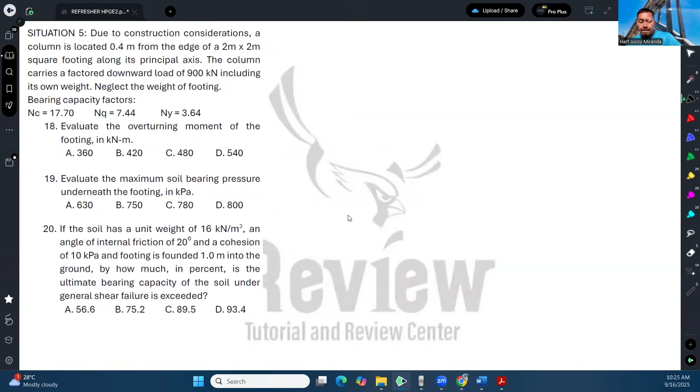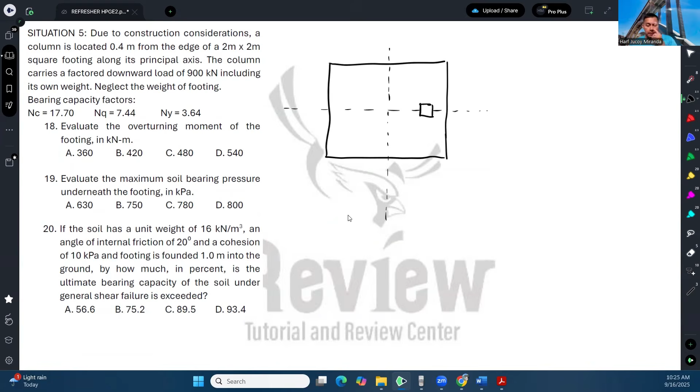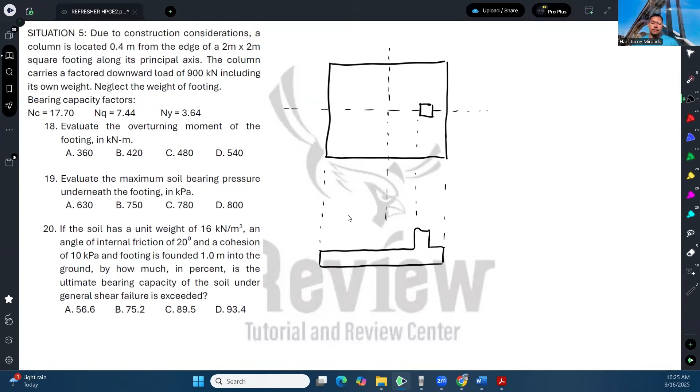First question: evaluate the overturning moment of the footing. So let's say this is our cross-section. This is the center. But our footing, our column is located here. So when we view it from this angle, here it is. So this is 2 by 2.

But it says this distance is 0.4 meter from the edge. So if that's the case, since this is the center, this should be 1 meter, and this should be 1 meter as well. So it turns out this should be 0.6 meter. That means the eccentricity from its own principal axis or centroid is 0.6 meter.

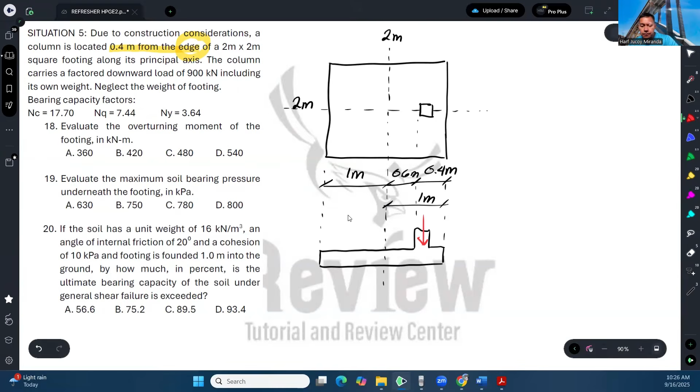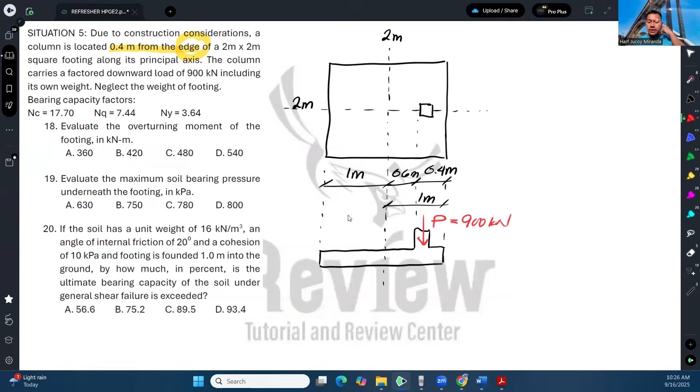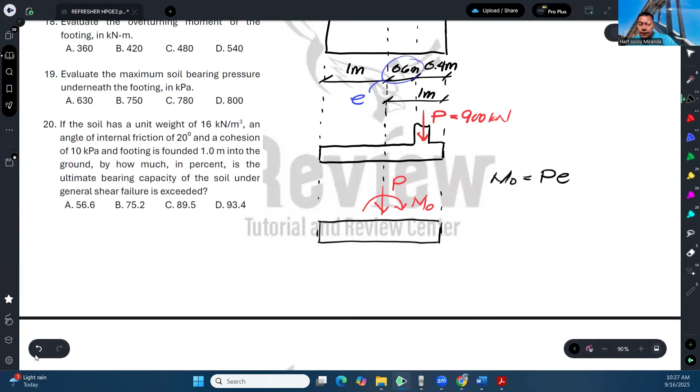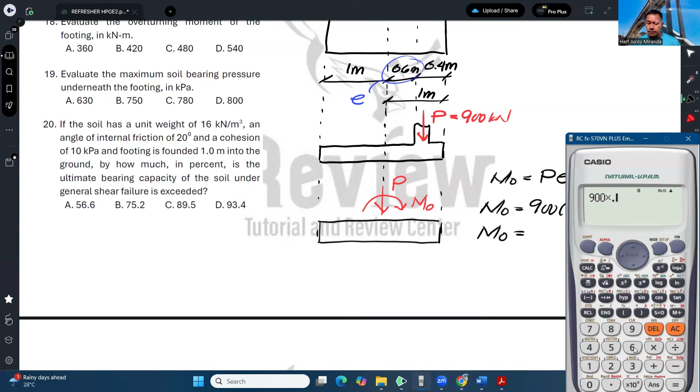So now here is the force, which is 900 kilonewtons. So the first question asks: what is the overturning moment? That's the moment produced at the centroid. This happens because the footing slab gets converted into a concentrated force and an overturning moment, where the overturning moment is calculated as P times the eccentricity. So we have Mo equal to 900 times 0.6, and that gives us 540 kilonewton-meters.

Next, evaluate the maximum soil bearing pressure. So we need to be careful here because although we know this is combined axial and bending, you can use P over A plus or minus MC over I. But because this is soil, the context is that soil cannot carry tension. So if tension occurs here, the P over A plus MC over I formula for maximum soil pressure is no longer valid.

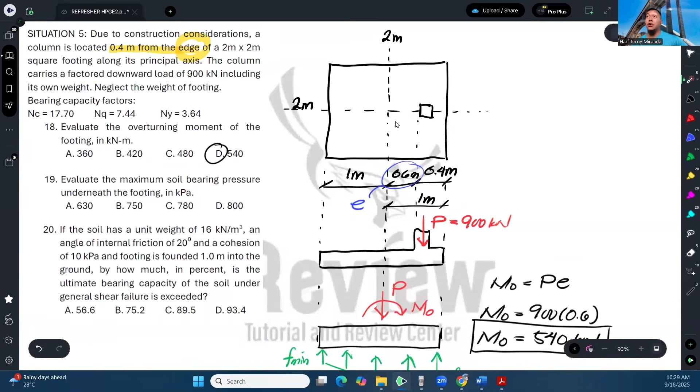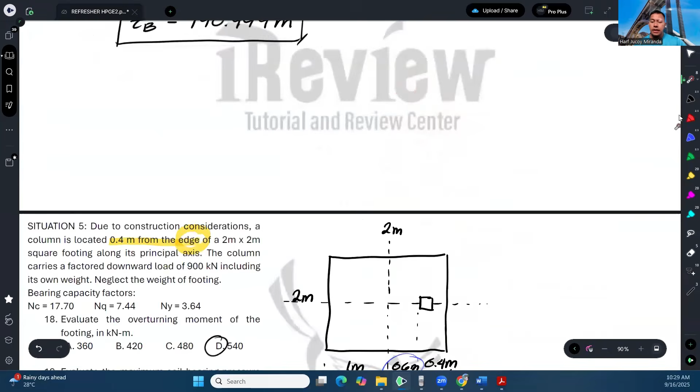So let's just check - it's quick anyway. So F min is equal to P over A minus MC over I. Our P is 900, our A is 2 squared since that's the area of the footing - this is the area.

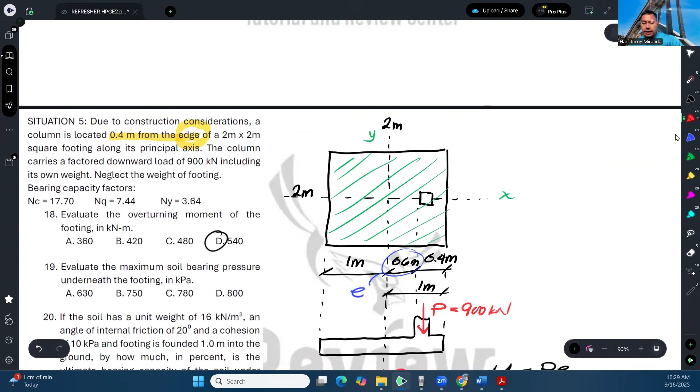So now let's call this the x-axis, let's call this the y-axis. Our moment is acting about the y-axis, so this should be My. So let me label this - My. So if this is My, this should be Iy, sorry, rather.

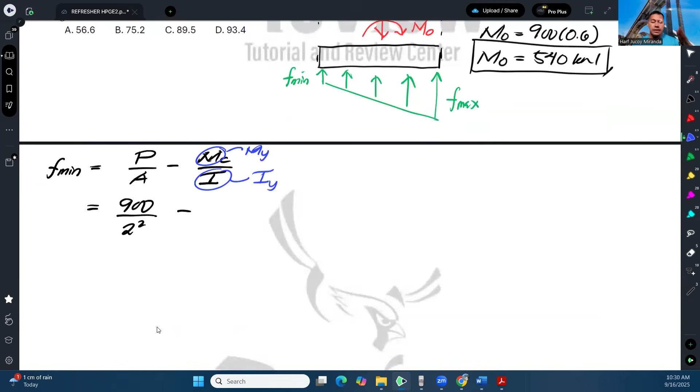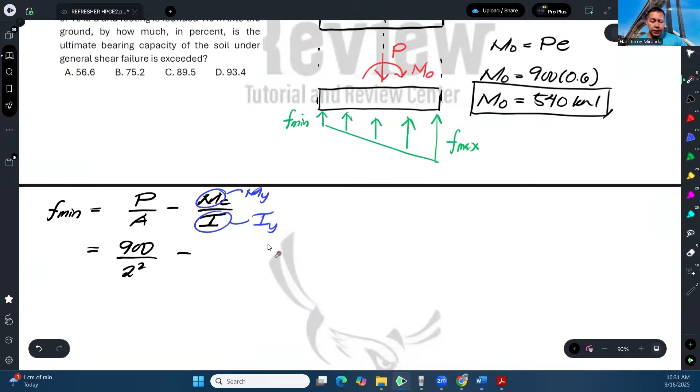In this case it doesn't matter much whether you look at X or Y since the dimensions are the same, so you won't make a mistake. But just in case the dimensions differ, when you compute moment of inertia, your axis should be parallel to the axis of rotation. So if this is our axis of bending, the moment of inertia formula is BH cubed over 12 - this is B, this is H cubed over 12. But if the axis of bending is here instead, then this is B and this is H - the cubed term in moment of inertia is always perpendicular to the axis of bending.

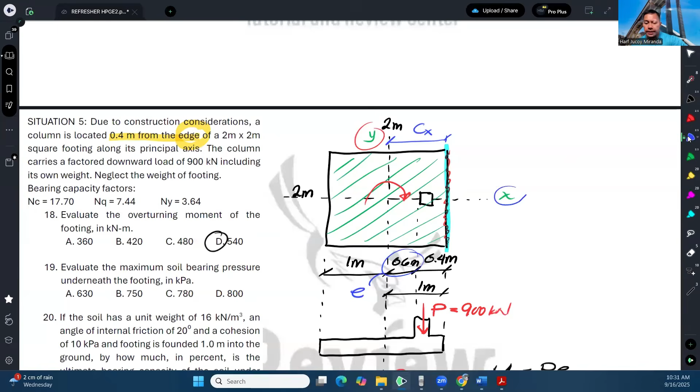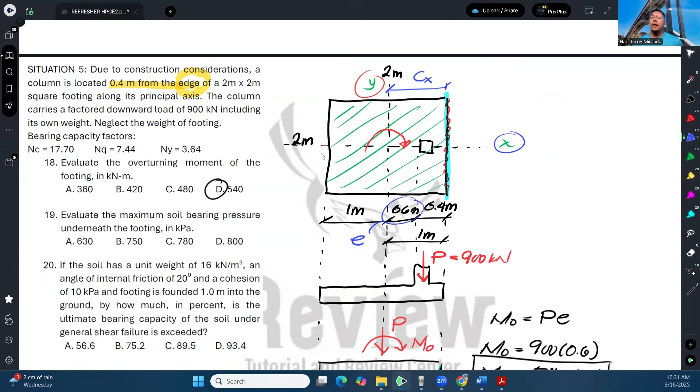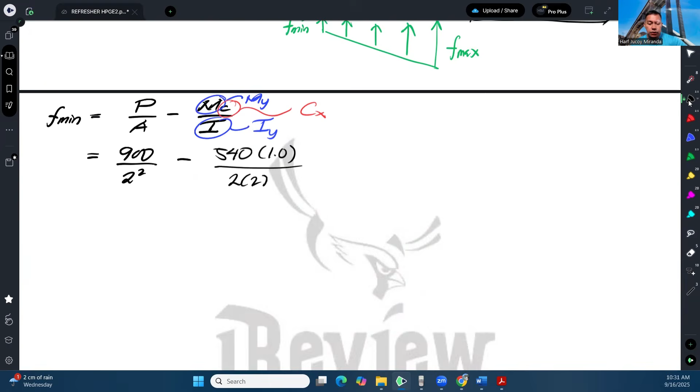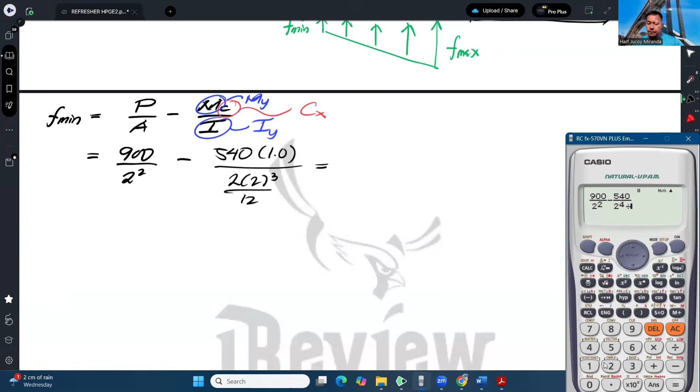So anyway, our M is 540, our C is 1 since it's half of 2, over I, so 2 times 2 cubed over 12. Let's see the value: 900 over 2 squared, minus 540 over 2 to the fourth over 12. That gives a negative result, which means tensile pressure occurs.

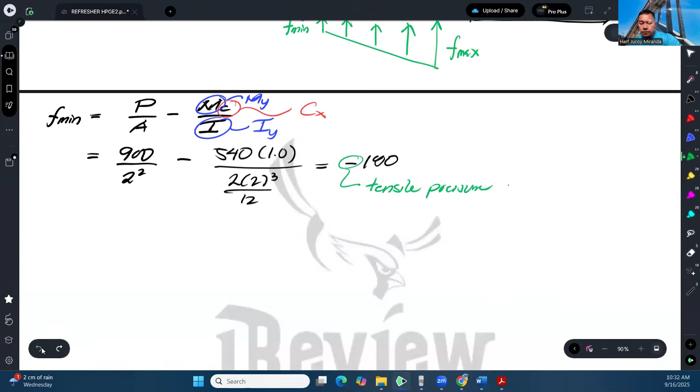Okay, so ibig sabihin hindi valid ito, hindi valid ito, F max is equal to P over A plus MC over I. So hindi mo to pwedeng gamitin.

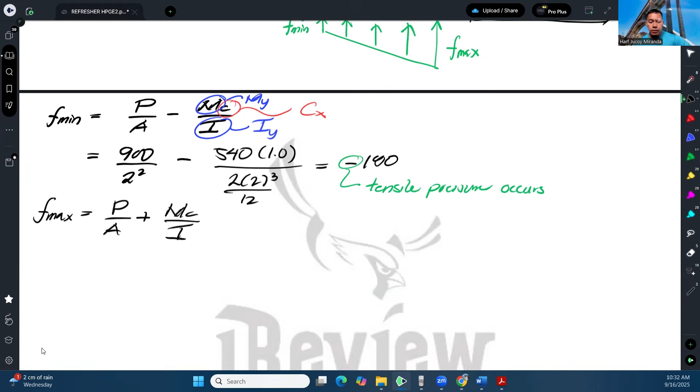So what should we do para makuha yun? So bali ganito yung mangyayari. Kung ito yung footing slab, ito yung gitna, ang ibig sabihin nun, yung soil pressure mo ganito. Meron tong tension, no?

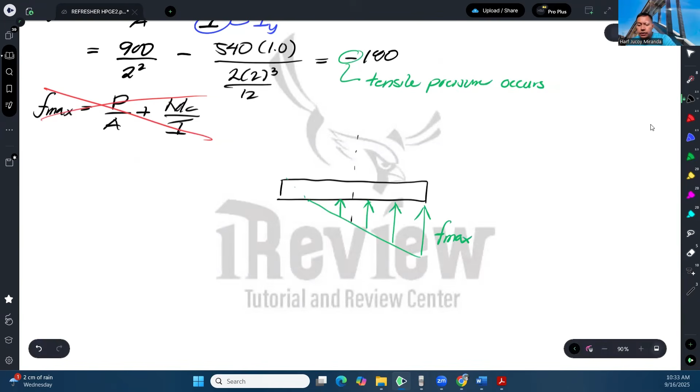Pero hindi natin sasama yung tension kasi nga hindi naman kayang mag-carry ng tension ni soil. So ang ginagawa para makuha natin yung F max na to, dapat kasi yung resultant nito, yung resultant force niyan ay equal lang dun sa applied force na P, which is 900.

Okay, pangalawang point is dapat ito located sa centroid nito. But alam natin na ito located sa point 4, di ba? So located siya sa point 4. So that means dapat yan yung X bar. Or ibig sabihin yan dapat ay located sa centroid nung triangle.

So ibig sabihin kung yan yung X bar, we can define kung ano itong distance na to. Tawagin ko na lang na A. At lumalabas dahil nga triangle ito, dapat yung X bar ay equal sa 1/3 ng A. Kasi triangle, di ba? Nandun yung centroid ng triangle sa 1/3.

So that means yung A natin is 3 times X bar, or yung A natin is 3 times 0.4. So ibig sabihin yung A natin is 1.2 meter. So ngayon, para ma-solve natin yung F max, no?

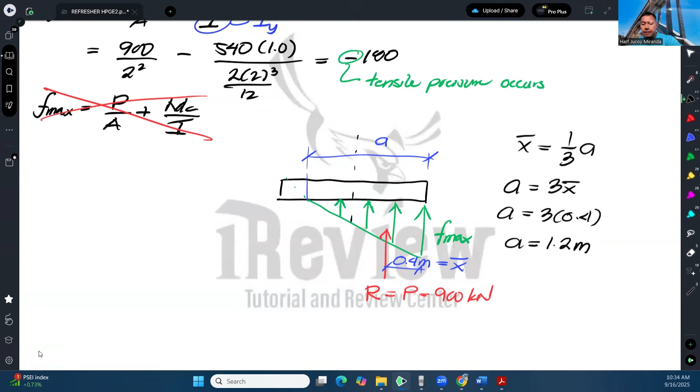So di ba dapat yung volume nitong pressure prism na to, kasi may kadugtong yan doon eh. So bali, volume talaga yan, pag ganun yan. Okay, yung volume dapat niyan ay equal dito. Kasi parang resultant force, no? Kapag ka two dimension, ang kino-compute mo lang area lang. Pero dahil ito ay 3D, so volume.

So therefore, ano ba yung volume niyan? 1/2 base yung A, yung height mo F max. Tapos yung width dun sa kabila, di ba ito yung 2 meters? 2 meters tong kabila. Okay, times 2. Yan na yung volume.

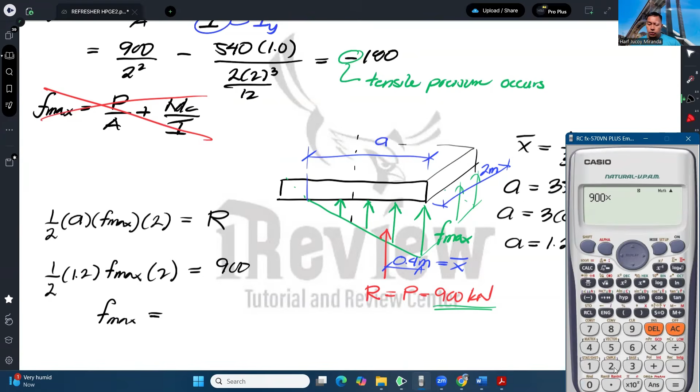Equal dapat yan sa P or sa R. Okay, and we know that A is 1.2. This F max times 2 is equal to 900. So therefore, we can solve for the actual maximum soil pressure. So 900 times 2 over 2 over 1.2. So that gives us 750 kilopascals.

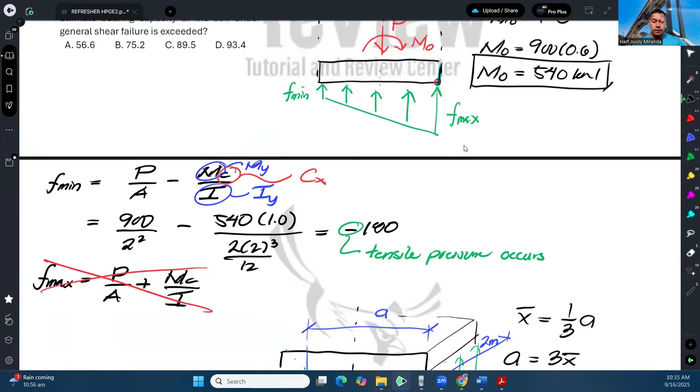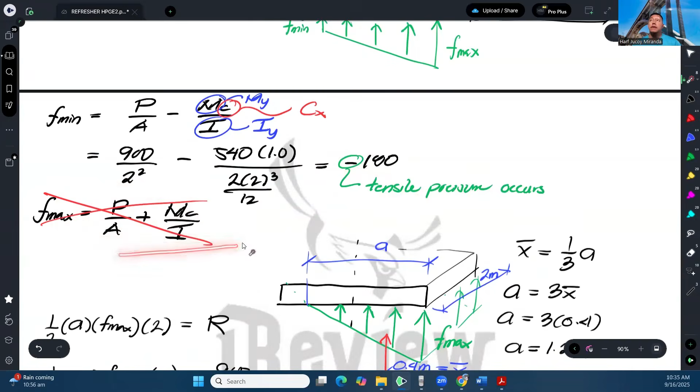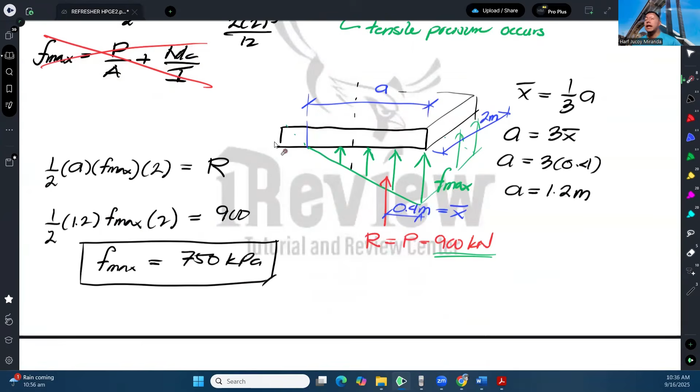Okay, so that's why our answer here is done. So, if you're asking, sir, kailan ko to gagamitin? Gagamitin nyo lang yan kapag hindi nag-negative to, kapag walang tensile pressure. Saka nyo lang to pwedeng gamitin. Kapag nagkaroon ng tensile pressure, gagantuhin natin. Kasi kailangan nating i-eliminate yung part na merong tension kasi hindi naman kayang mag-resist ni soil ng tension. Ang kaya niya lang i-resist is compression.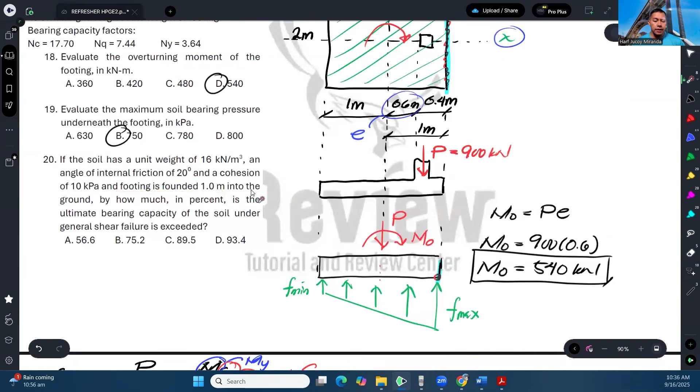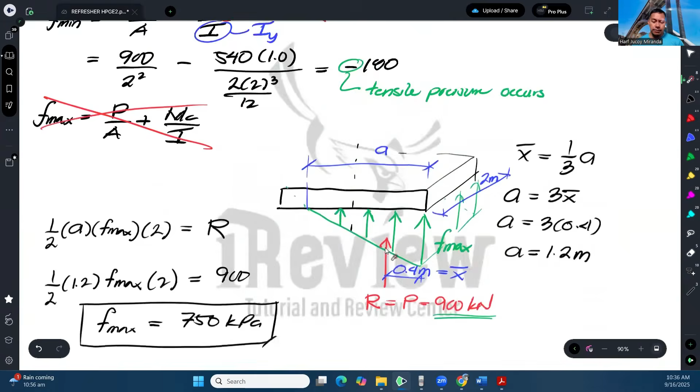Okay, and lastly, if the soil has a unit weight of 16 kilonewton per cubic meter, an angle of internal friction of 20 degrees, and a cohesion of 10 kilopascal, footing is founded 1 meter into the ground, by how much in percent is the ultimate bearing capacity of the soil under general shear failure exceeded? Parang ano yung percent difference nung maximum pressure na to dun sa ultimate bearing capacity niya. So, isolve lang natin ultimate bearing capacity niya.

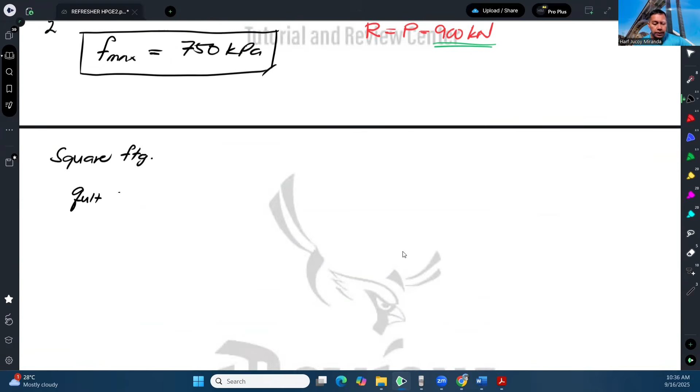So from Terzaghi, dahil ito ay square footing, we have Q ultimate is equal to 1.3 CNC plus Q1 NQ plus 0.4 Q2 N gamma. Okay, so where Q1 is yung effective stress ng depth ng footing. So balik ko ito yung footing natin.

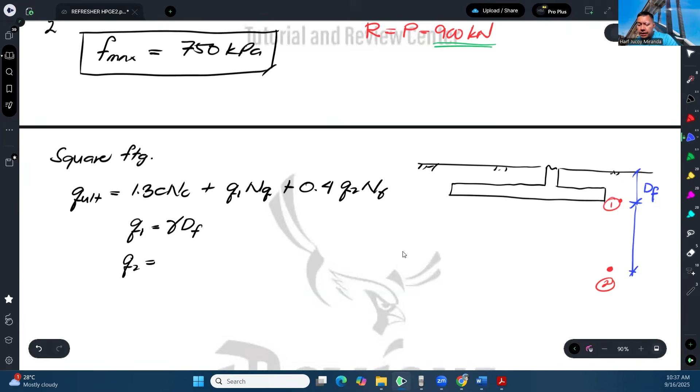So di ba meron kang depth ng footing? Ayan, yung effective stress dito, di ba? Yun yung Q1. So we have gamma times depth ng footing. And then yung Q2 is yung effective stress naman mula dun sa point 1 hanggang point 2, hanggang dito. At yung depth na to is yung B distance, which is equal sa dimension lang ng footing. So, ibig sabihin, this is gamma times B.

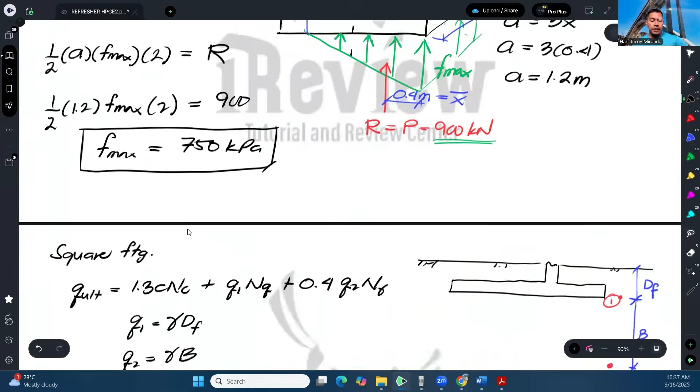Okay, so kumpitin natin. 1.3 yung C ay 10, NC, given naman yun eh. O 17.7. So, kung hindi given yan, bibigyan naman kayo ng table niyan or ng graph. Plus Q1, so yung Q1 is gamma DF. So, ito yung DF natin, depth ng footing. Ito yung gamma, ito yung C. Okay, so 16 times 1.

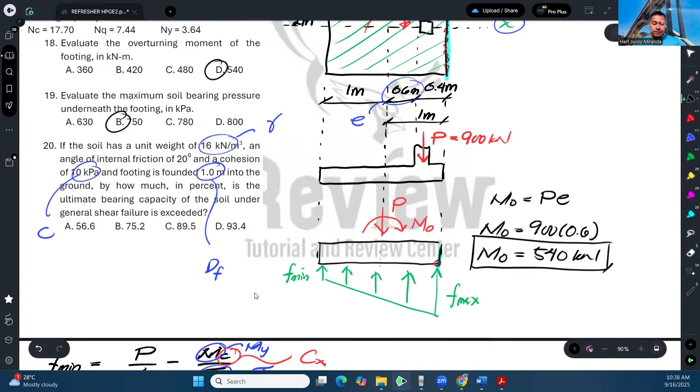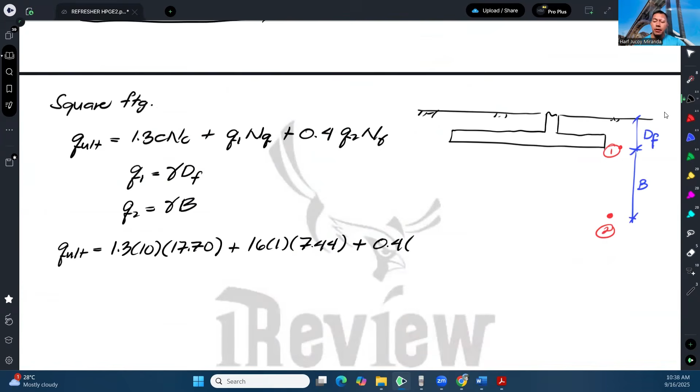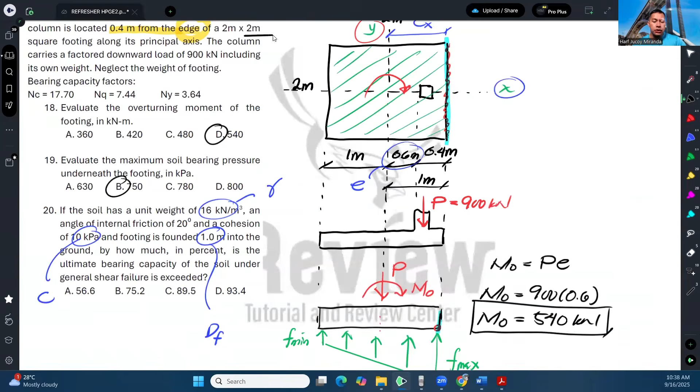Ang NQ natin ay 7.44, plus 0.4 Q2. So wala namang sinabi na groundwater table kaya we don't need to worry about effective pressure. So we have 16 pa rin, tapos yung B natin is 2, times N gamma which is 3.64.

Okay, so again, sa board exam minsan tinatanong, ano yung mga contribution nung ultimate bearing capacity nung iba't ibang criteria na pinanggalingan ng ultimate bearing capacity. So ito yung contribution ng cohesion. Ito naman yung contribution ng overburden pressure. Tapos ito yung contribution ng footing dimension, footing shape or dimension. Okay, minsan tinatanong yan isa-isa, pero sa case na to, hindi naman.

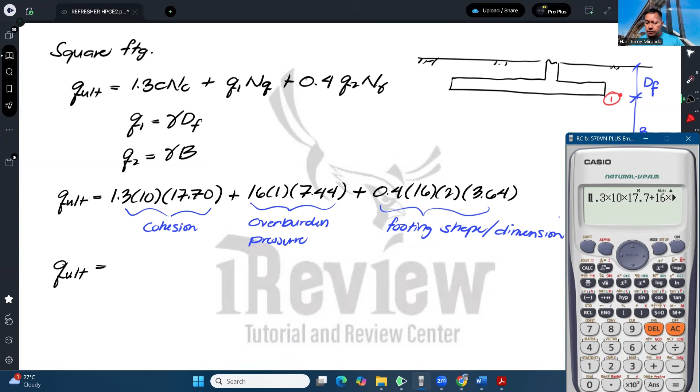So, solve na natin yung ultimate bearing capacity, yung total. So, that's 395.73 kilopascal. So, yan ngayon yung ultimate bearing capacity.

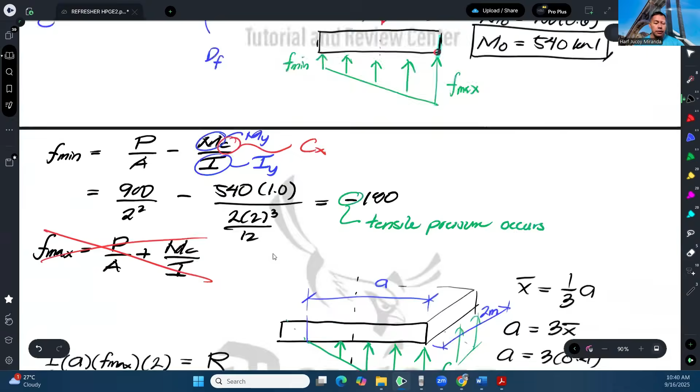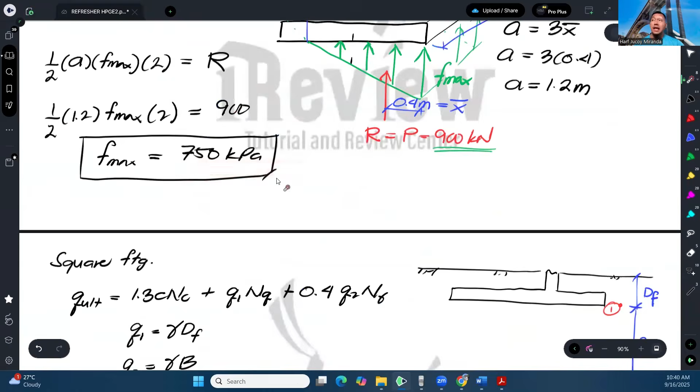Now, to answer yung question, ano daw yung by how much it is exceeded or in percent, no? Parang percent difference. So, kasi ang maximum natin, di ba, 750 eh. So, lagpas talaga, mag-fail talaga yung soil na to kasi ang kaya niya lang na i-resist 395.

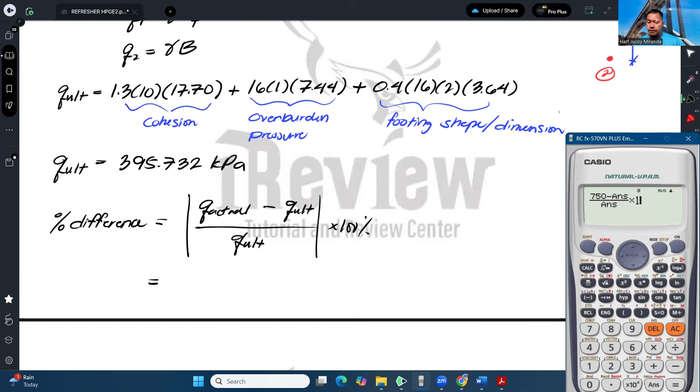So, to answer the last question, yung percent difference is equal to the actual minus yung ultimate over ultimate times 100%. Okay, and that gives us 750 minus 395.73 over 395.73 times 100. So 89.52%.

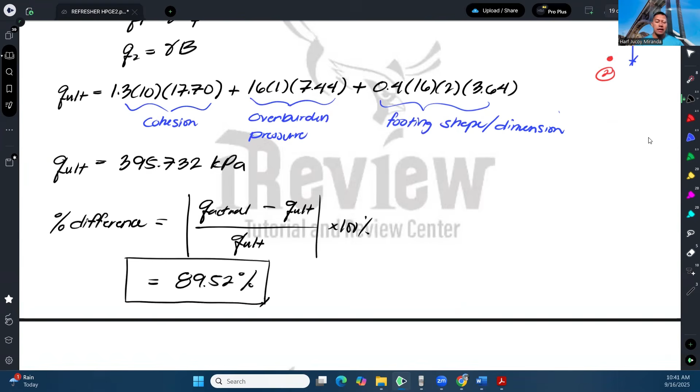So the ultimate bearing capacity is exceeded by 89.52%. So ganun kalaki yung pagnilaki nung stress. Okay?